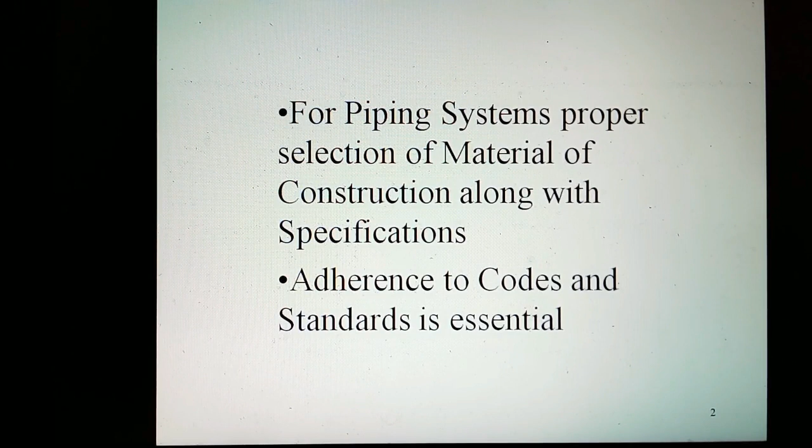For piping systems, proper selection of material of construction along with specifications and adherence to codes and standards is essential. Standardization reduces cost, confusion, and inconvenience.

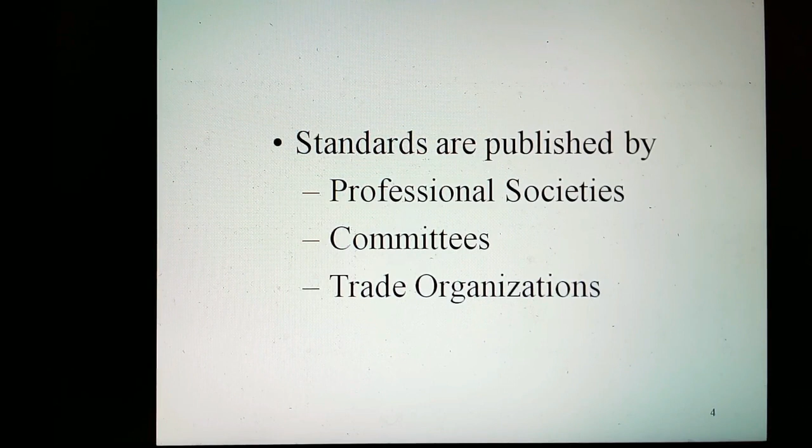Standards are published by professional societies, committees, and trade organizations. Code is also accepted by government. The main objective is to have standardization and safety.

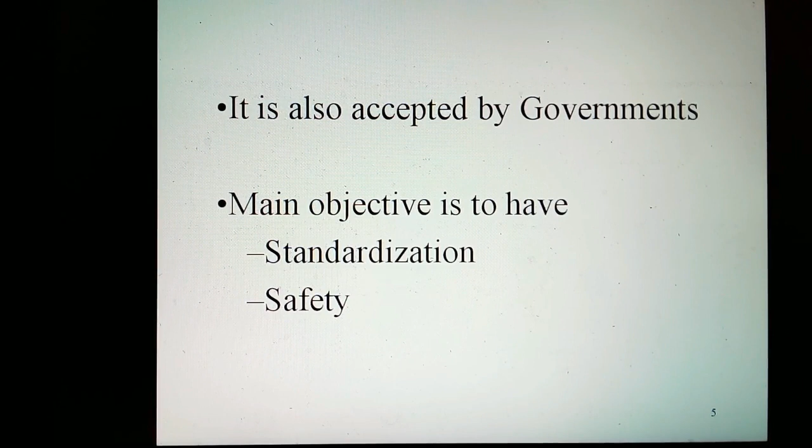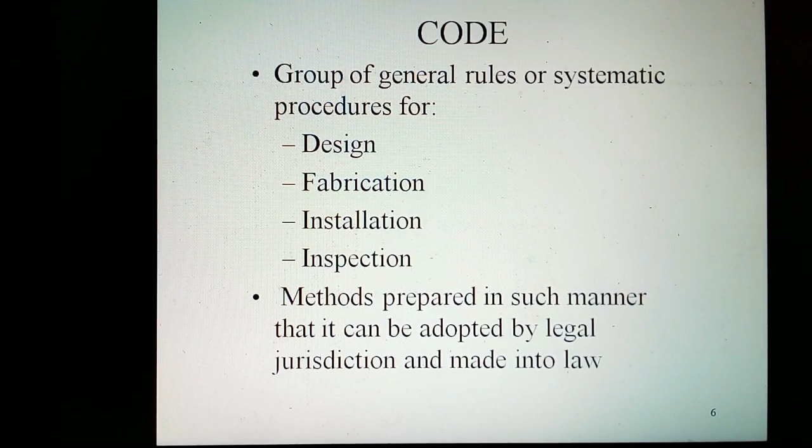A code is a group of general rules or systematic procedures for design, fabrication, installation, and inspection methods, prepared in such a manner that it can be adopted by legal jurisdiction and made into a law.

Standards are documents prepared by a professional group or committee which are believed to be good and proper engineering practices and which contain mandatory requirements.

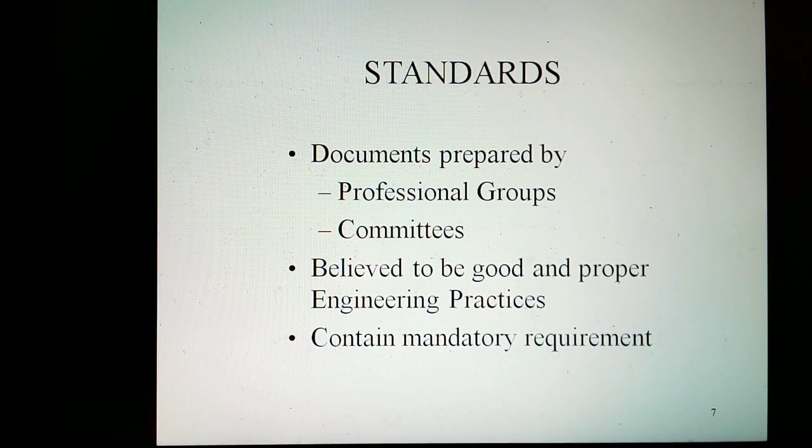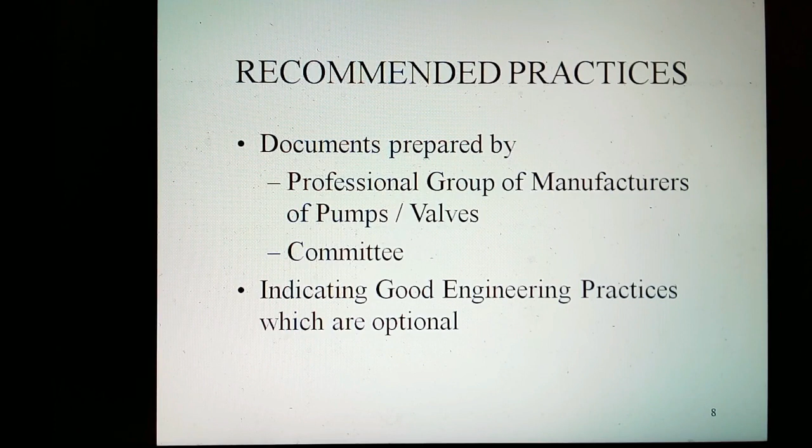Recommended practices are documents prepared by a professional group or committee indicating good engineering practices, but which are optional. Companies also develop guides in order to have consistency in documentation. These cover various engineering methods which are considered good practices, without specific recommendations or requirements.

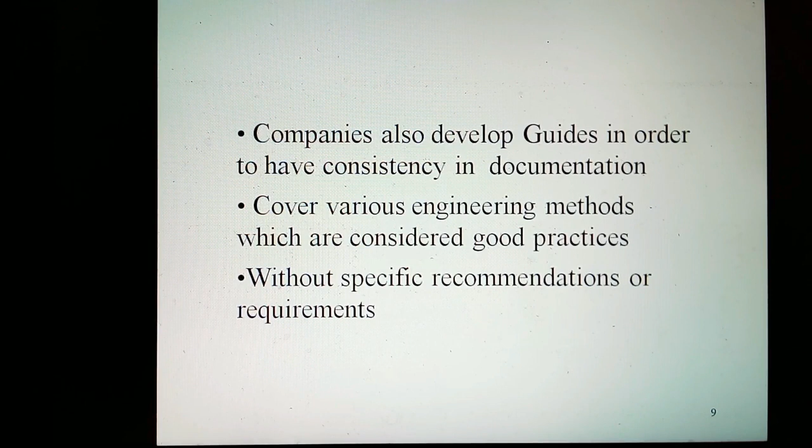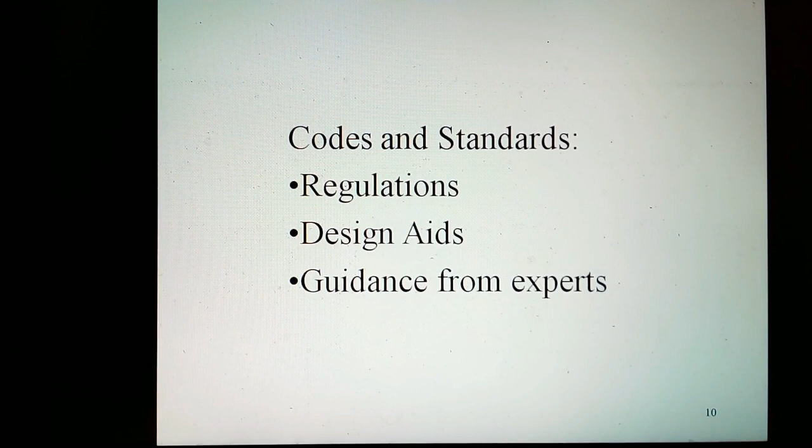Codes and standards, besides being regulations, might also be considered as design aids, since they provide guidance from experts.

Each country has its own codes and standards. On a global basis, American national standards are the most widely used, and compliance with those requirements is accepted worldwide. In India, other than American standards, British and Indian standards are also used for design and selection of piping systems.

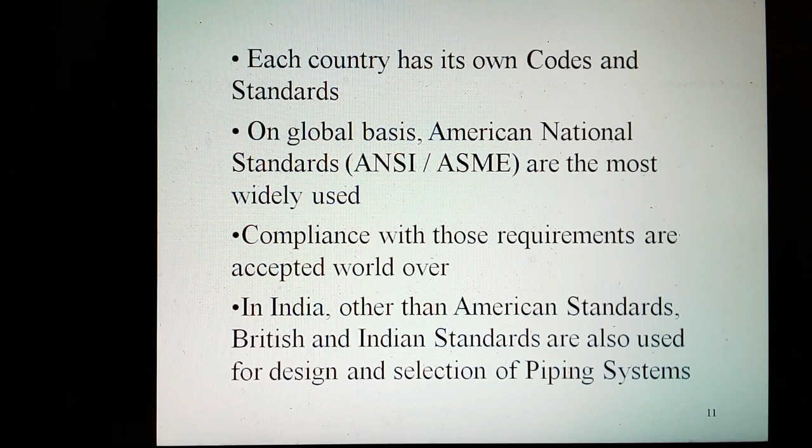American standards: not all American standards are issued directly by the American National Standards Institute. Material standards are covered under ASTM, American Society for Testing and Materials, and dimension standards under ANSI, American National Standards Institute. Most of these standards are adopted by ASME, American Society for Mechanical Engineers.

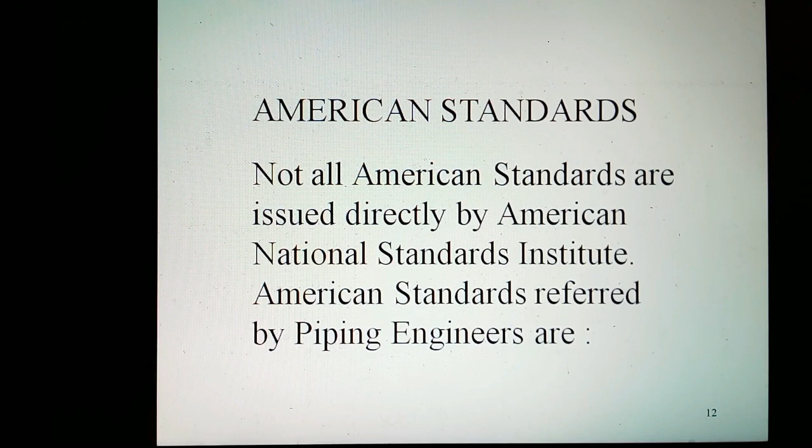The American standards referred by piping engineers include AISI, American Iron and Steel Institute, which specify a material by its chemical and physical properties. When a specific model or manufacturer of the element is not to be specified, the material can be identified by ANSI standards.

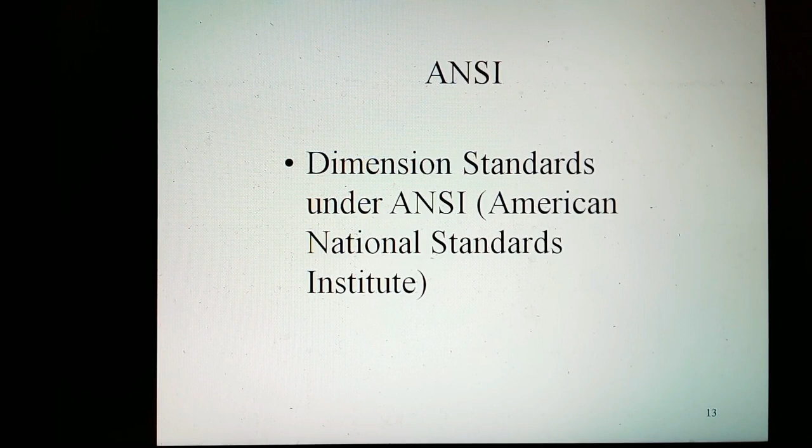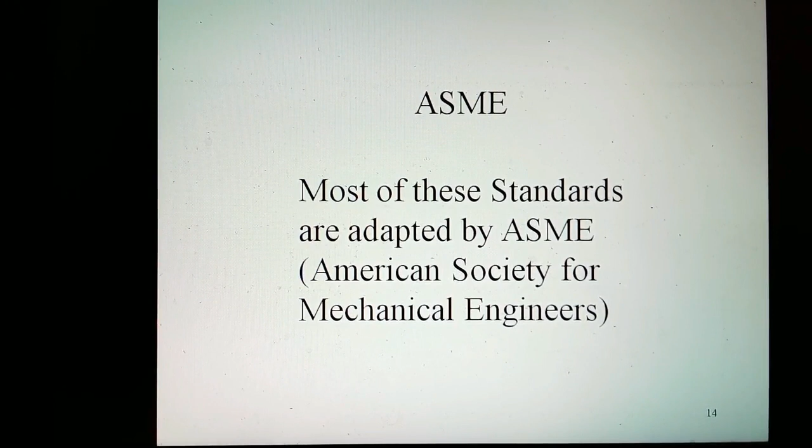ASME: most of these standards are adopted by ASME, American Society for Mechanical Engineers. ASTM: these are material standards covered under ASTM, American Society for Testing and Materials.

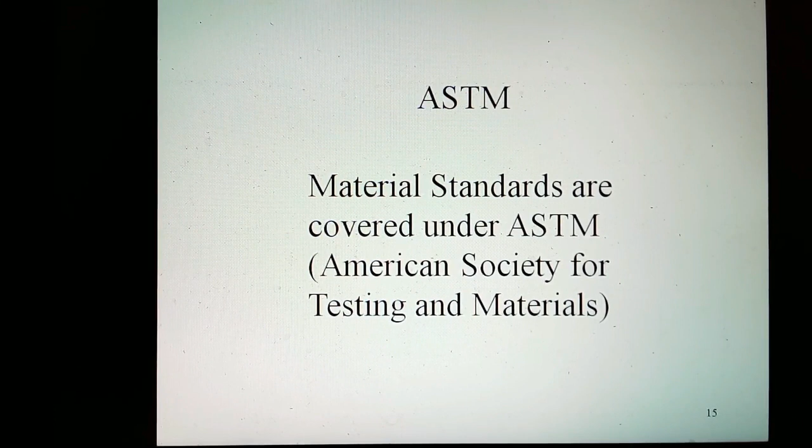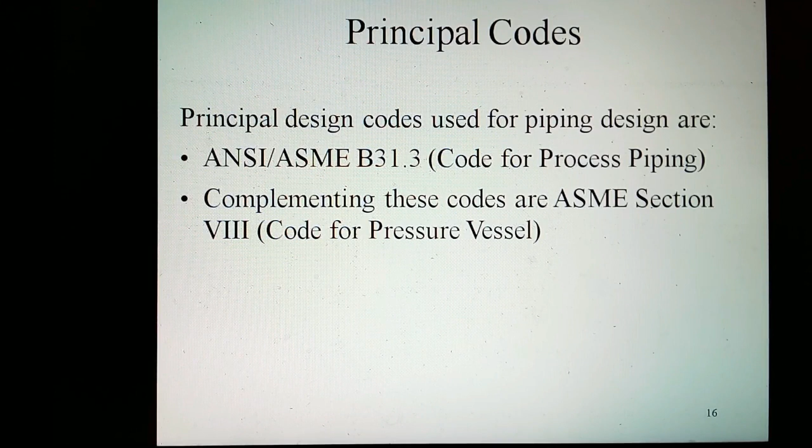Principal design codes used for piping design are ANSI or ASME B31.3, the code for process piping. Complementing these codes is ASME Section VIII, the code for pressure vessels.

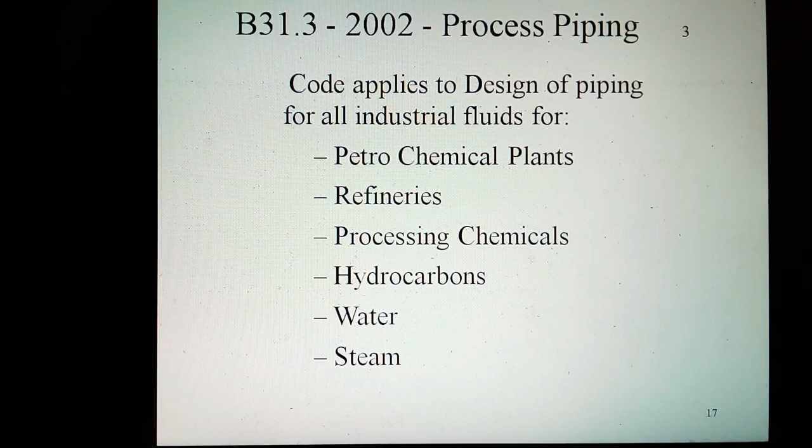B31.3, 2002, is the code for process piping design of chemical and petroleum plants and refineries, processing chemicals and hydrocarbons, water and steam.

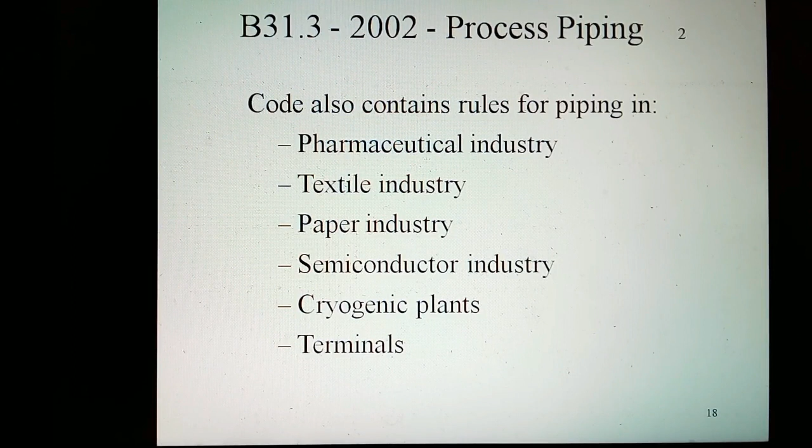This code contains rules for piping in chemical, pharmaceutical, textile, paper, semiconductor, and cryogenic plants, and related processing plants and terminals.

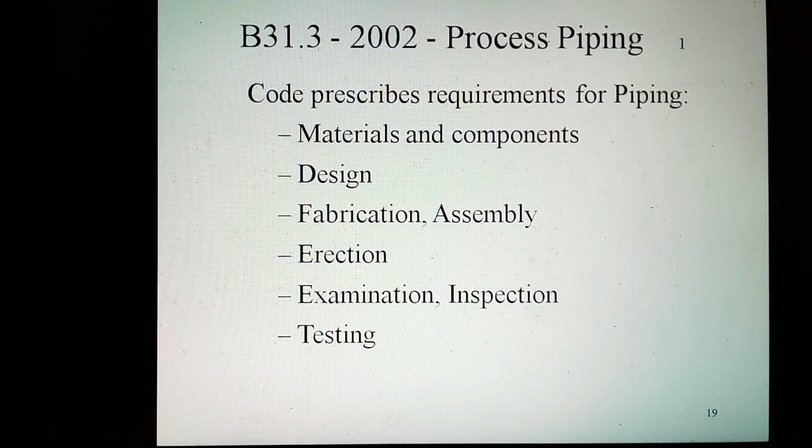This code prescribes requirements for materials and components, design, fabrication, assembly, erection, examination, inspection, and testing of piping.

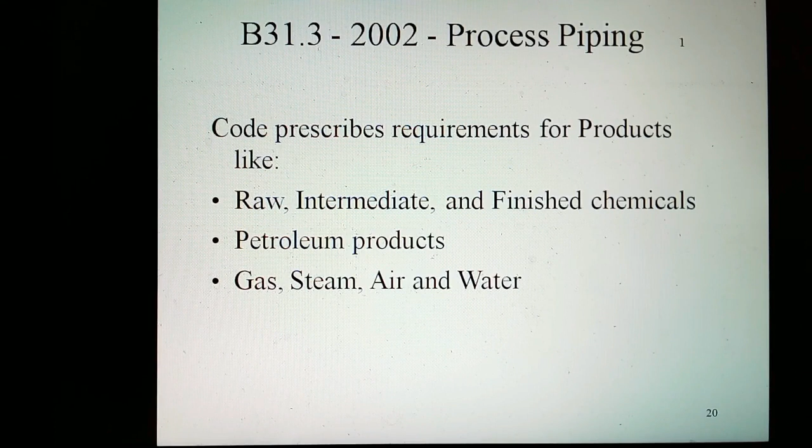This code applies to piping for all fluids including raw, intermediate, and finished chemicals, petroleum products, gas, steam, air, and water. It also applies to piping for fluidized solids, refrigerants, and cryogenic fluids. Also included is piping which interconnects pieces or stages within packaged equipment assembly.

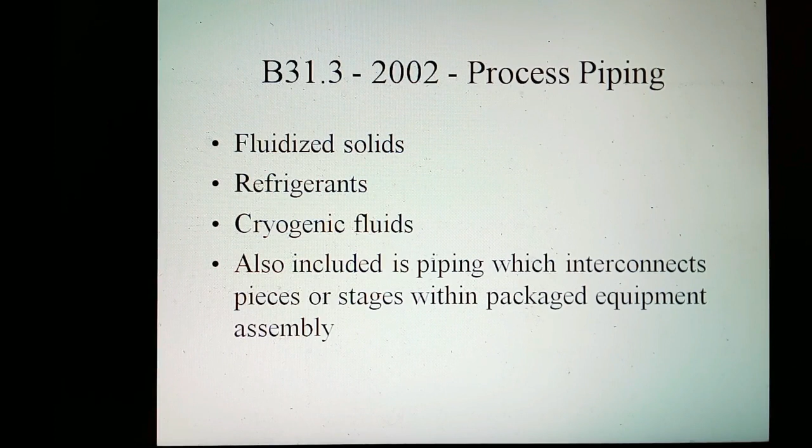Other American National Standards Institute standards used in design of piping systems: ANSI B31.1 of 2001 for power piping, ANSI B31.2 for fuel gas, ANSI B31.4 for pipeline transportation systems for liquid hydrocarbon and other liquids, and ANSI B31.5 for refrigeration piping.

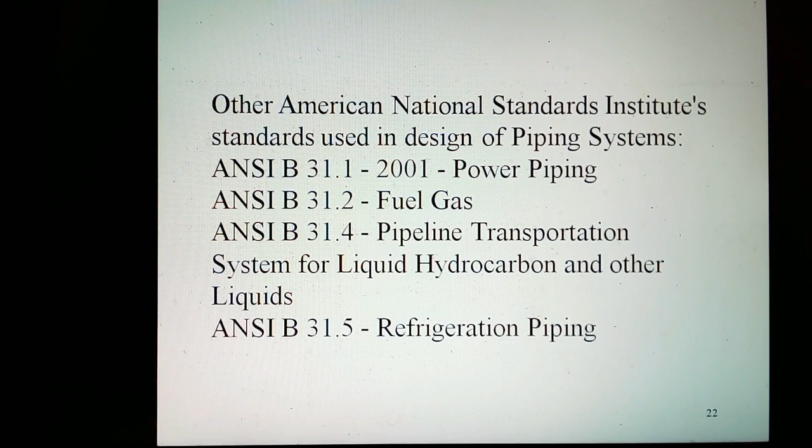Other American National Standards Institute standards used in design of piping systems: ANSI B31.8 for gas transmission and distribution piping systems, ANSI B31.9 for building services piping, ANSI B31.11 for slurry transportation piping systems, and ANSI B31.G, a manual for determining remaining strength of corroded piping, which is a supplement to ANSI B31.

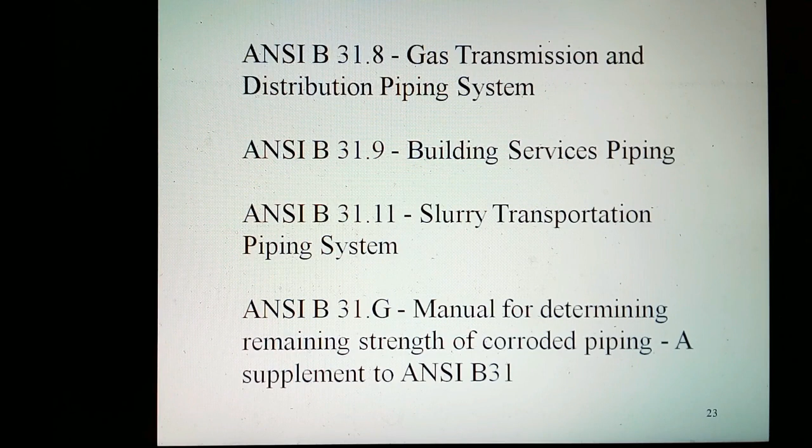The American Petroleum Institute API standards referred to by piping engineers are API 5L for specification for line pipe, API 6D for pipeline valves and end closures, connectors and swivels, API 6F for recommended practice for fire test for valves, API 593 for ductile iron plug valves for flanged ends, API 598 for valve inspection and test, API 600 for steel gate valves, and API 601 for metallic gaskets for refinery piping.

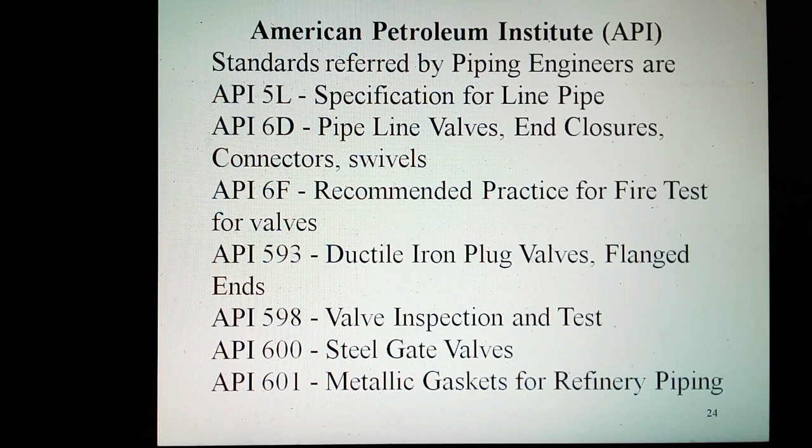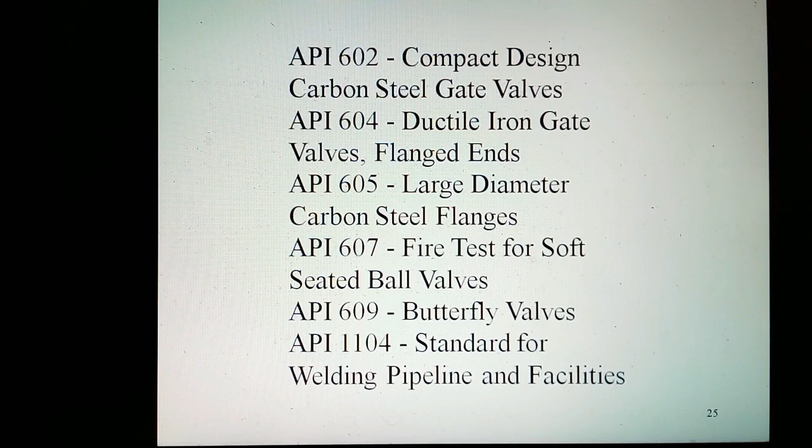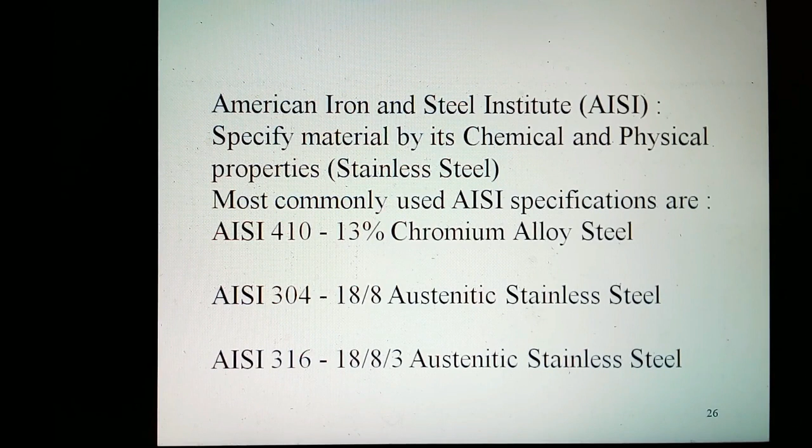American Iron and Steel Institute, AISI, specifies material by its chemical and physical properties for stainless steels. The most commonly used AISI specifications are AISI 410 for 13% chromium alloy steel, AISI 304 for 18/8 austenitic stainless steel, and AISI 316 for 18/8/3 austenitic stainless steel.

Other major ANSI or ASME standards referring to piping elements are ANSI B1.1 for unified inch screw threads, ASME B1.20.1 for pipe threads for general purposes, ASME B16.1 for cast iron pipe flanges and flanged fittings, ASME B16.3 for malleable iron threaded fittings, ASME B16.4 for cast iron threaded fittings, and ASME B16.5 for steel pipe flanges and flanged fittings.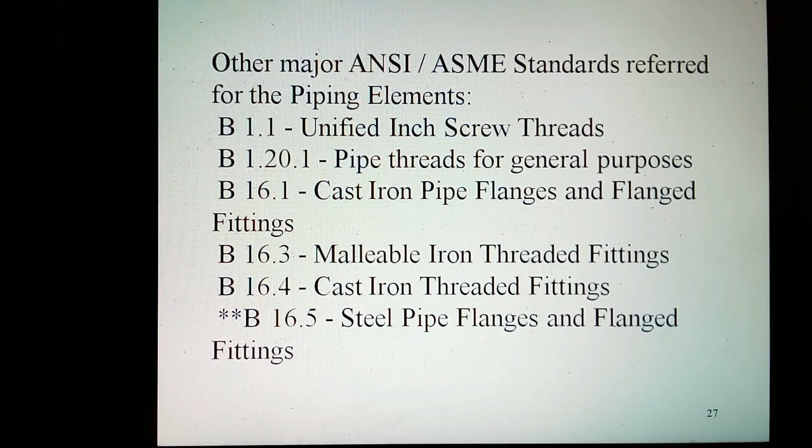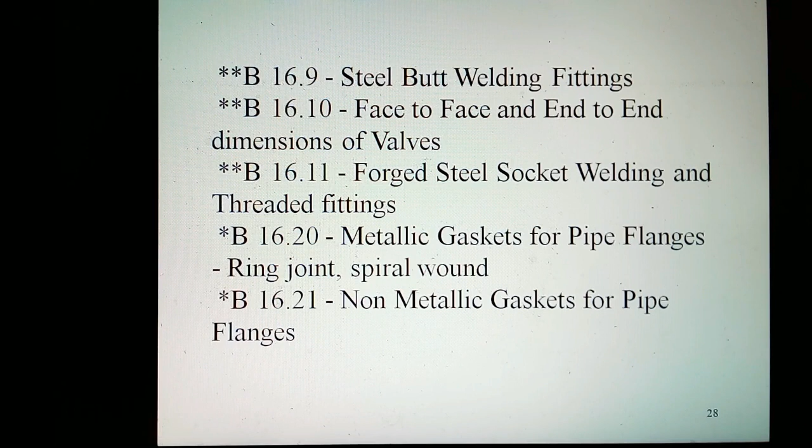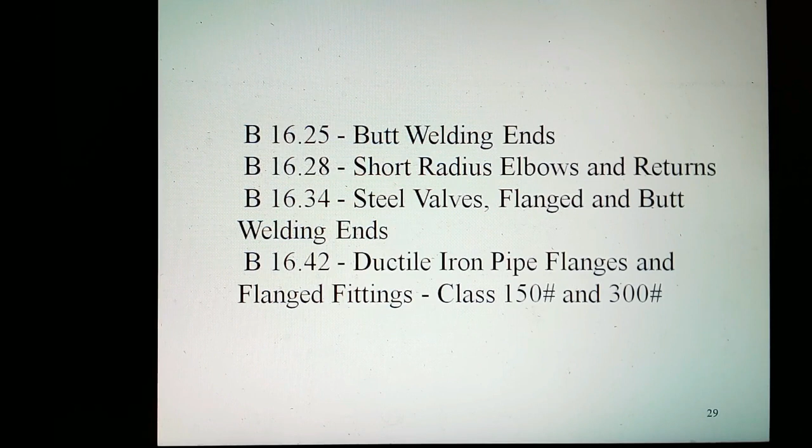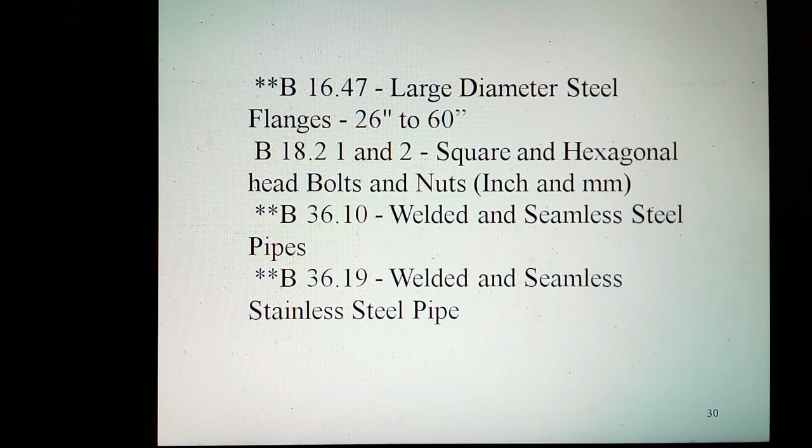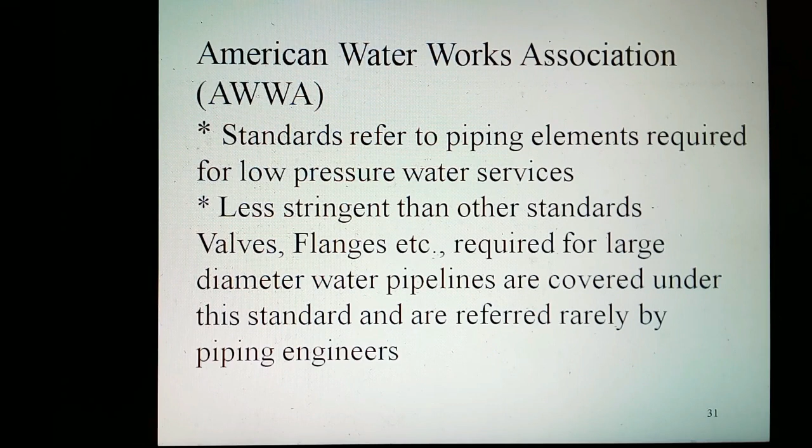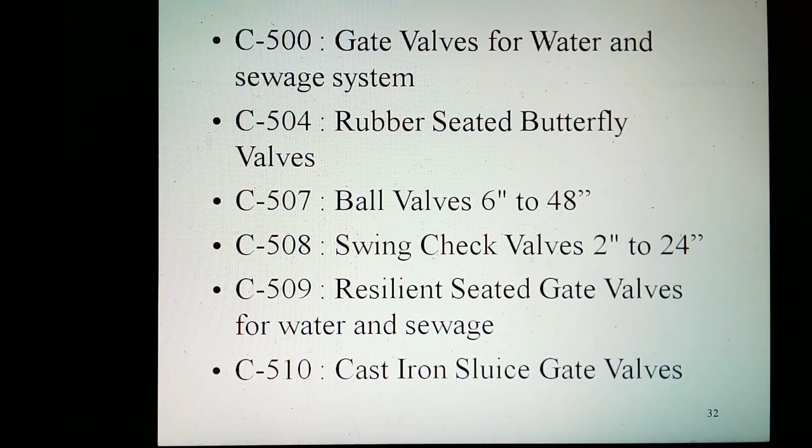Some standards referred are C500 for gate valves for water and sewage systems, C504 for rubber-seated butterfly valves, C507 for ball valves 6 inches to 48 inches, C508 for swing check valves 2 inches to 24 inches, C509 for resilient seated gate valves for water and sewage, and C510 for cast iron sluice gate valves.

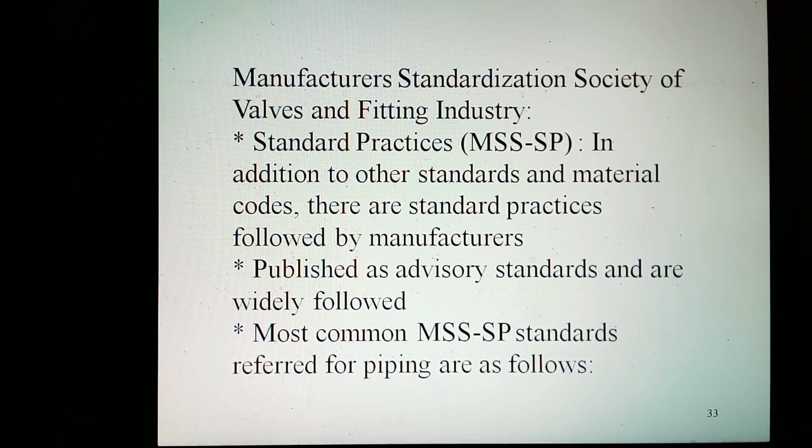The Manufacturers Standardization Society of the Valves and Fittings Industry Standard Practices, MSS-SP. In addition to the above standards and material codes, there are standard practices followed by manufacturers. These are published as advisory standards and are widely followed. The most common MSS-SP standards referred for piping are as follows.

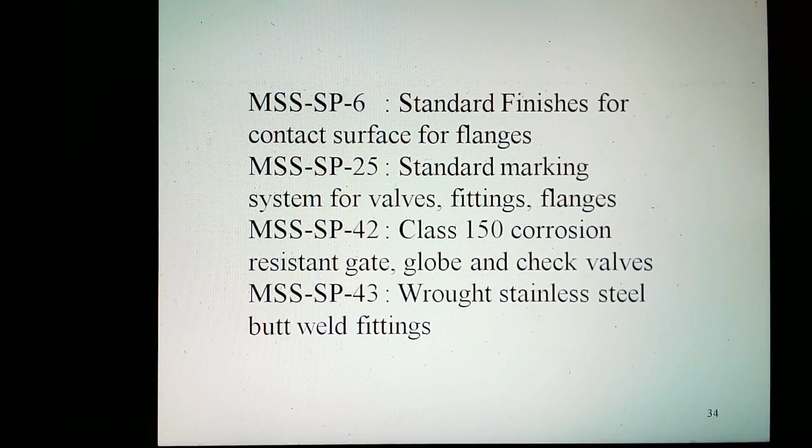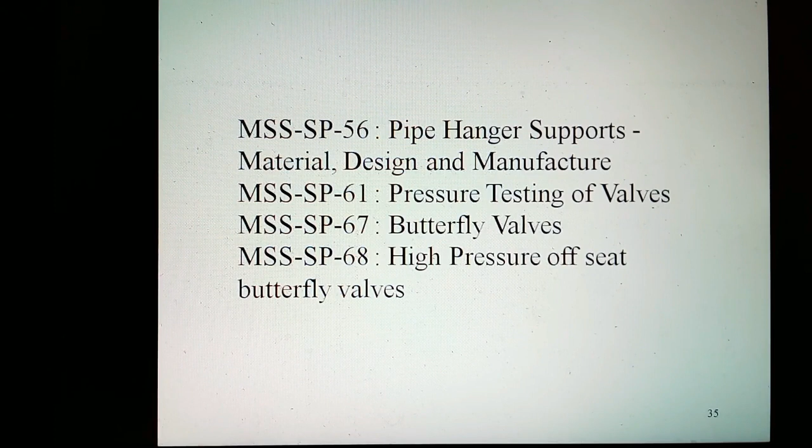MSS-SP 56, Pipe Hanger Supports explaining Material, Design and Manufacture. MSS-SP 61, Pressure Testing of Valves. MSS-SP 67, Butterfly Valves. MSS-SP 68, High Pressure Off-Seat Butterfly Valves.

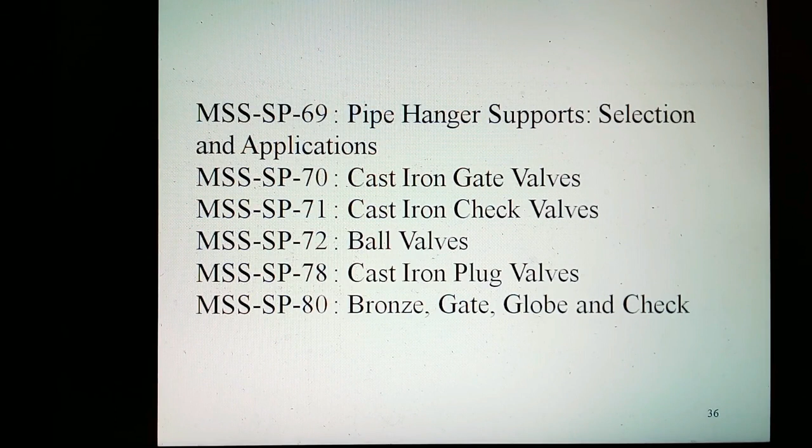MSS-SP 69, Pipe Hanger Supports, Selection and Applications. MSS-SP 70, Cast Iron Gate Valves. MSS-SP 71, Cast Iron Check Valves. MSS-SP 72, Ball Valves. MSS-SP 78, Cast Iron Plug Valves. MSS-SP 80, Bronze Gate, Globe and Check Valves.

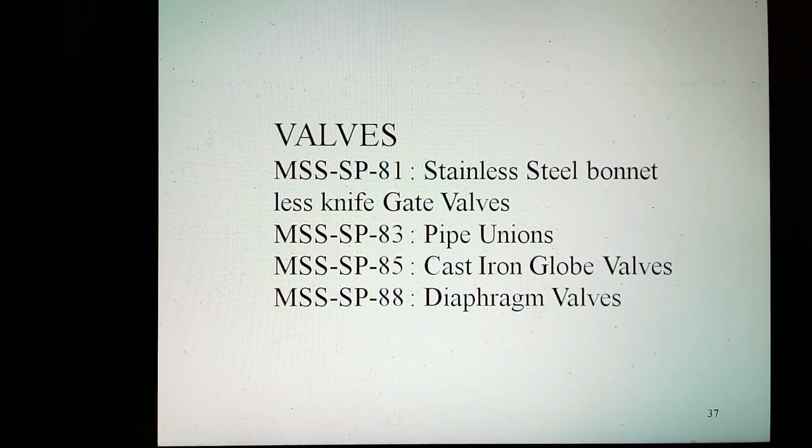MSS-SP 81, Stainless Steel Bonnetless Knife Gate Valves. MSS-SP 83, Pipe Unions. MSS-SP 85, Cast Iron Globe Valves. MSS-SP 88, Diaphragm Valves. MSS-SP 89, Pipe Hangers and Supports explaining Fabrication and Installation Practices.

MSS-SP 90, Pipe Hangers and Supports with Guidelines on Terminology. MSS-SP 92, MSS Valve User Guide. MSS-SP 108, Resilient Seated Eccentric Cast Iron Plug Valves.

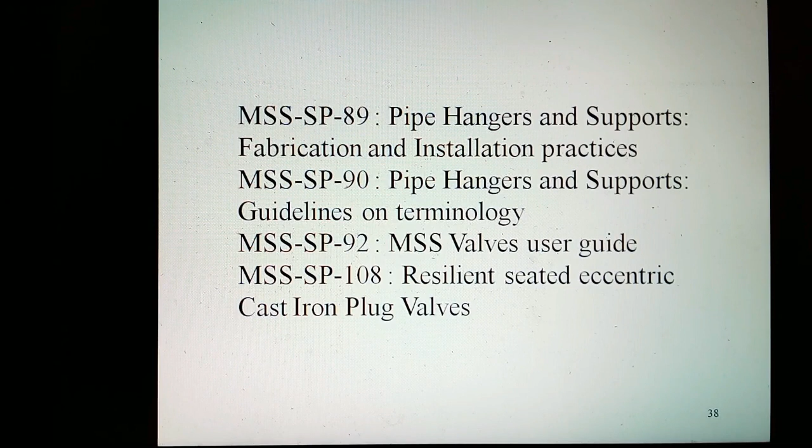British Standards. In many instances, it is possible to find British standards which may be substitutes for American standards. BS 2080, the British standard for face-to-face or end-to-end dimensions of valves, is identical to ANSI/ASME B16.10. Similarly, BS 3799 and ANSI/ASME B16.11 also compare.

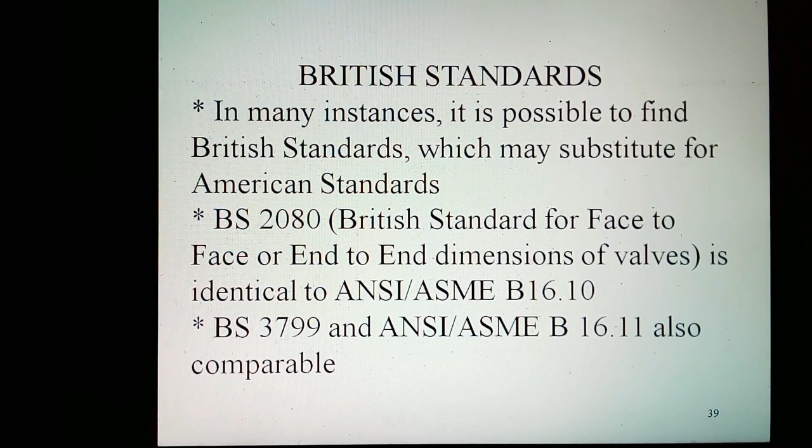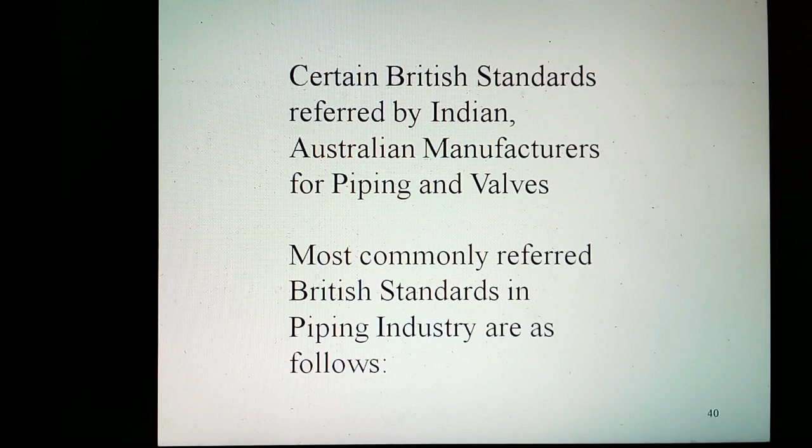There are certain British standards referred by Indian manufacturers for piping and valves. The most commonly referred British standards in the piping industry are BS-10 for flanges and BS-806 for pipes and fittings for boilers.

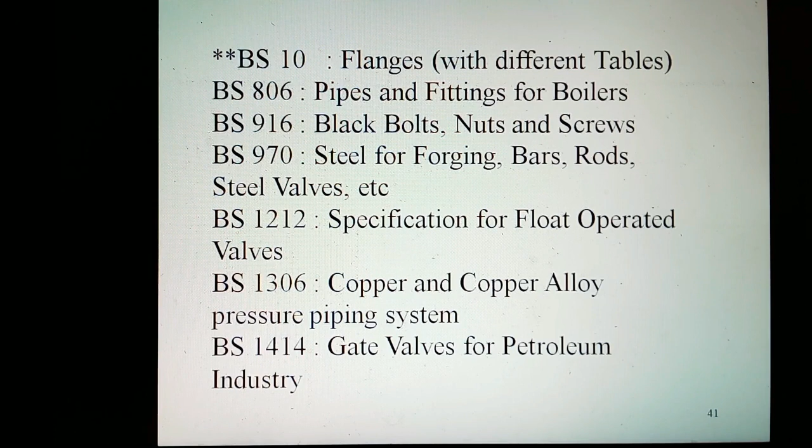BS-916 for black bolts, nuts and screws. BS-970 for steel for forging, bar, rods, valves, steel, etc. BS-1212 specification for float-operated valves. BS-1306 for copper and copper alloy pressure piping systems.

BS-1414 for gate valves for the petroleum industry. BS-1560 for steel pipe flanges. BS-1600 for dimensions of steel pipes. BS-1640 for welding fittings.

BS-1740 for wrought steel screw pipe fittings. BS-1868 for steel check valves for the petroleum industry. BS-1873 for steel globe and check valves for the petroleum industry. BS-1965 for welding pipe fittings.

BS-2080 for face-to-face and end-to-end dimensions of valves. BS-2598 for glass pipeline and fittings. BS-3059 for boiler and superheater tubes. BS-3063 for dimensions of gaskets for pipe flanges.

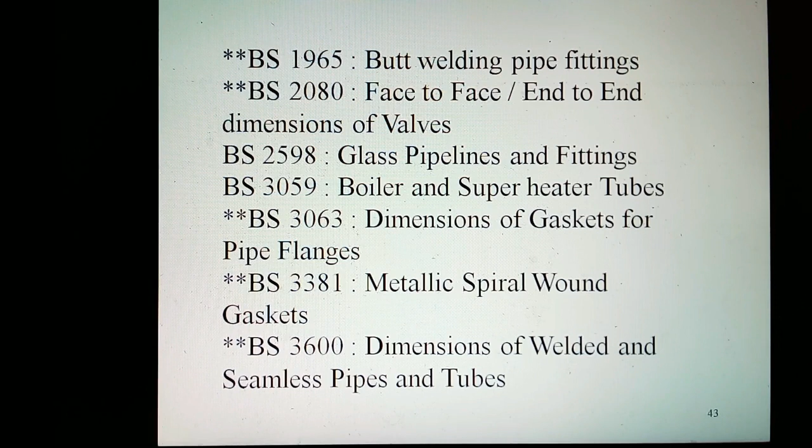BS-3381 for metallic spiral wound gaskets. BS-3600 for dimensions of welded and seamless pipes and tubes. BS-3601 for carbon steel pipes and tubes for pressure purposes at room temperature. BS-3602 for carbon steel pipes and tubes for pressure purposes at high temperature.

BS-3603 for carbon steel and alloy steel pipes and tubes for pressure purposes at low temperature, and BS-3604 for alloy steel pipes and tubes for high temperature.

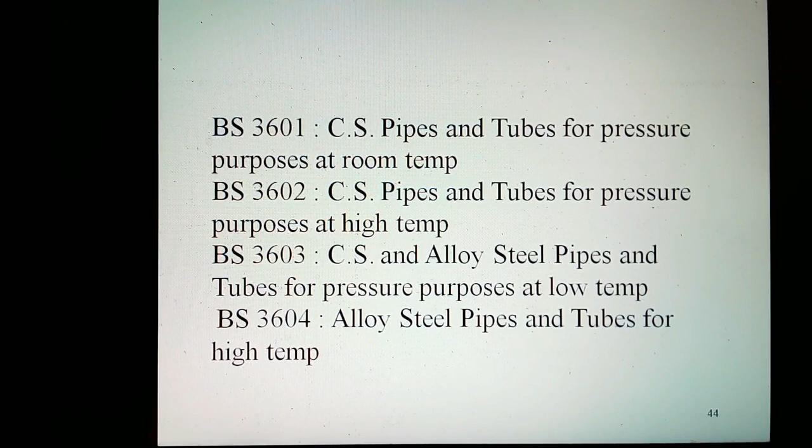BS-3605 for stainless steel pipes and tubes for pressure purposes. BS-3799 for socket weld and screw fittings. BS-3974 for pipe hangers, slides and roller type supports.

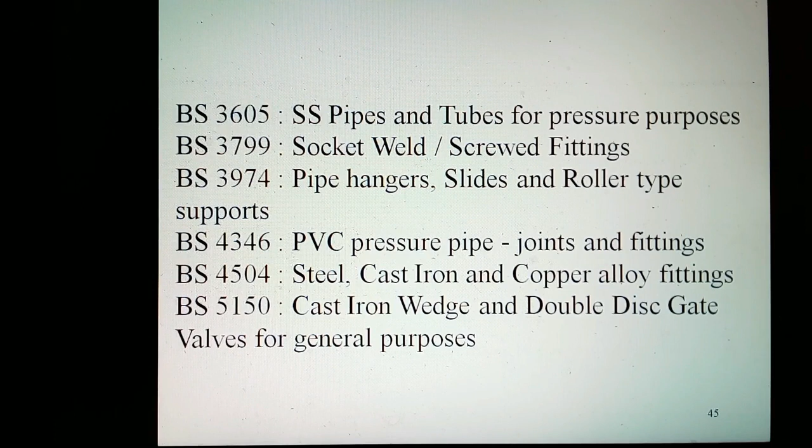BS-4346 for PVC pressure pipe, joints and fittings. BS-4504 for steel, cast iron and copper alloy fittings. BS-5150 for cast iron wedge and double disc gate valves for general purposes. BS-5151 for cast iron gate parallel slide valves for general purposes.

BS-5152 for cast iron globe and check valves for general purposes. BS-5153 for cast iron check valves for general purposes. BS-5154 for copper alloy globe, gate and check valves. BS-5155 for cast iron and cast steel butterfly valves for general purposes.

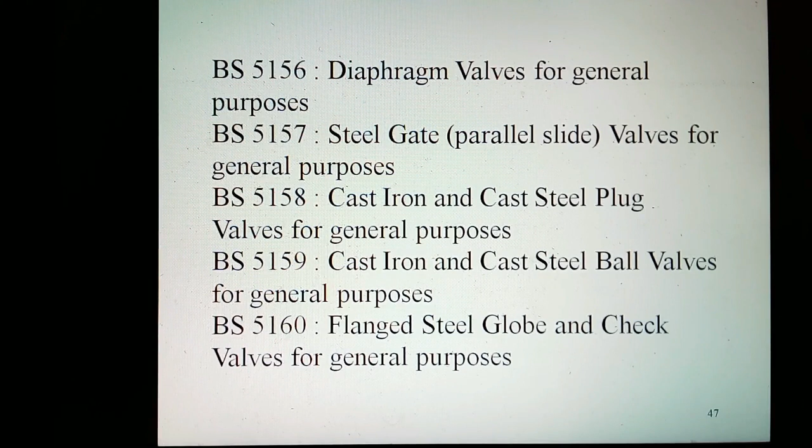BS-5156 diaphragm valves for general purposes. BS-5157 steel gate parallel slide valves for general purposes. BS-5158 cast iron and cast steel plug valves for general purposes. BS-5159 cast iron and cast steel ball valves for general purposes. BS-5160 flanged steel globe and check valves for general purposes.

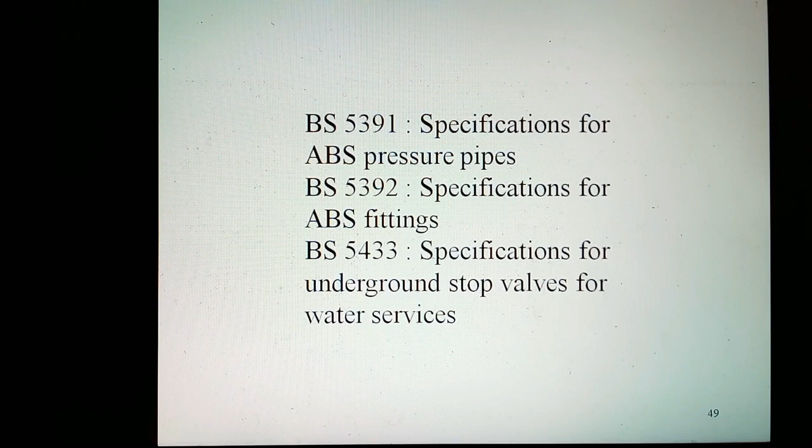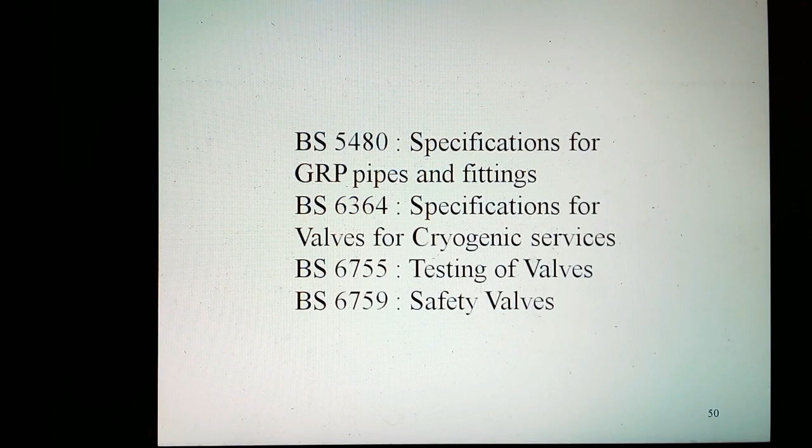BS-5392 specifications for ABS fittings. BS-5433 specifications for underground stop valves for water services. BS 5480 specifications for GRP pipes and fittings. BS 6364 specifications for valves for cryogenic services. BS 6755 testing of valves. BS 6759 safety valves.

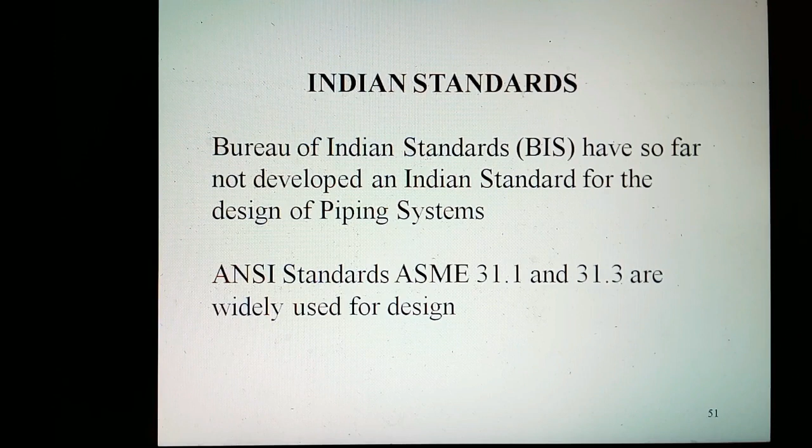Indian Standards, Bureau of Indian Standards. BIS has so far not developed an Indian standard for the design of piping systems. Hence, ANSI standards ASME 31.1 and 31.3 are widely used for the design. These standards also accept materials covered in other standards. Unlike American standards, Indian standards cover dimensions and material specifications under the same standard number. There are no groupings based on branch of engineering.

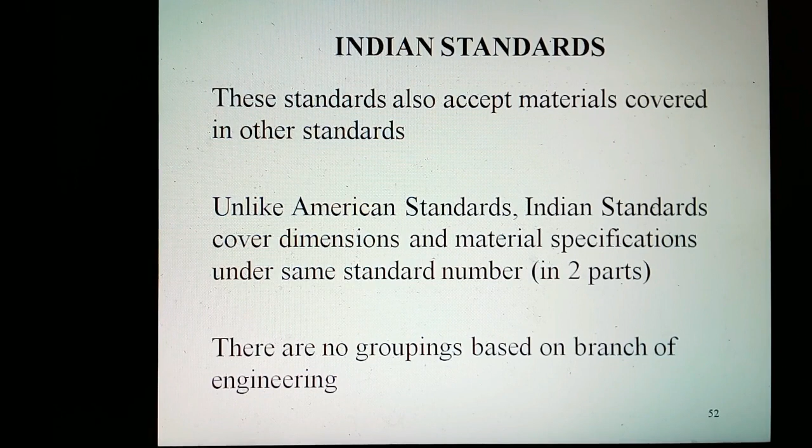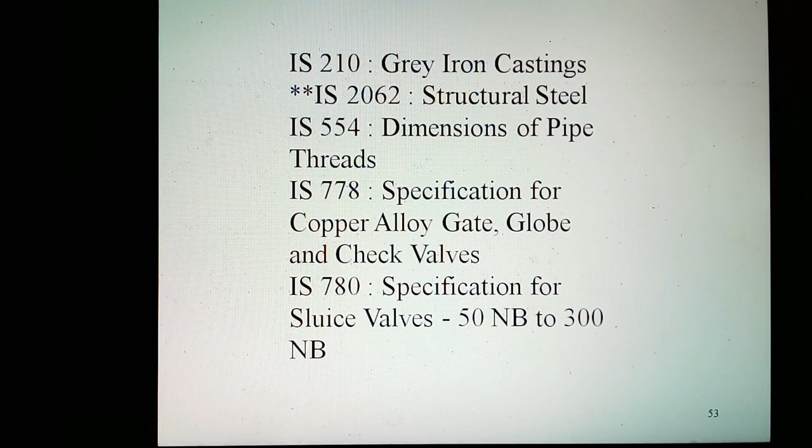Some of the most commonly referred Indian standards by piping engineers are IS 210, grey iron castings; IS 226, structural steel, superseded by IS 2062; IS 554, dimensions of pipe threads; IS 778, specification for copper alloy gate, globe and check valves; IS 780, specification for sluice valves for 50 NB to 300 NB.

IS 1239 Part I and II, specification for mild steel tubes and fittings; IS 1363, hexagonal bolts, screws and nuts of grade C; IS 1364, hexagonal bolts, screws and nuts grade A and B; IS 1367, technical supply conditions for threaded steel fasteners; IS 1536, centrifugally cast iron pipes.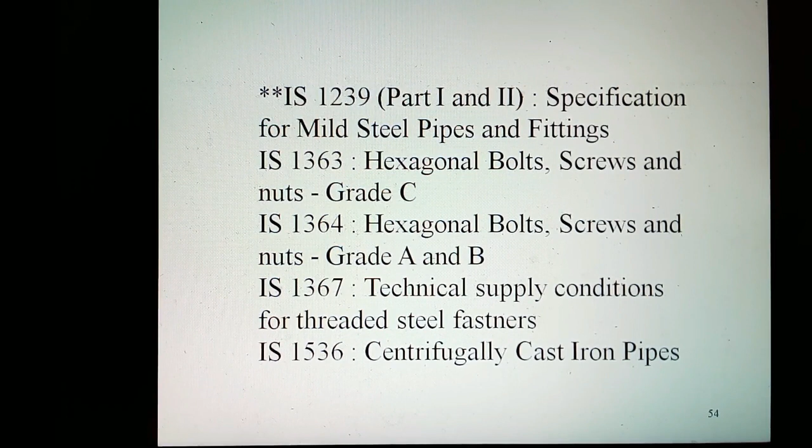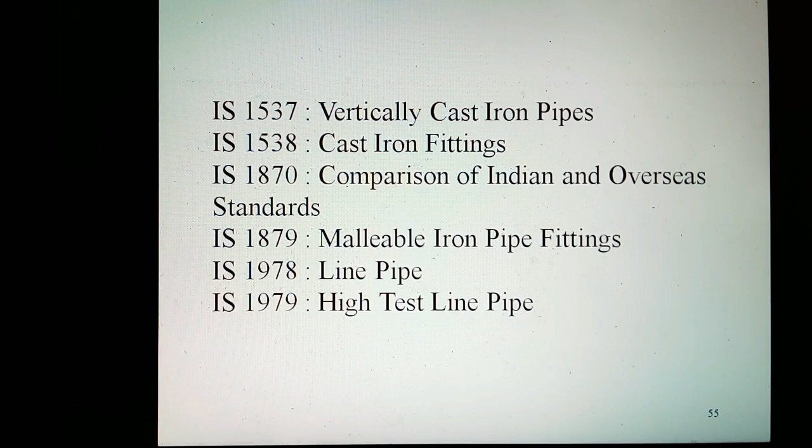IS 1537, vertically cast iron pipes; IS 1538, cast iron fittings; IS 1870, comparison of Indian and overseas standards; IS 1879, malleable iron pipe fittings; IS 1978, line pipe; IS 1979, high test line pipe.

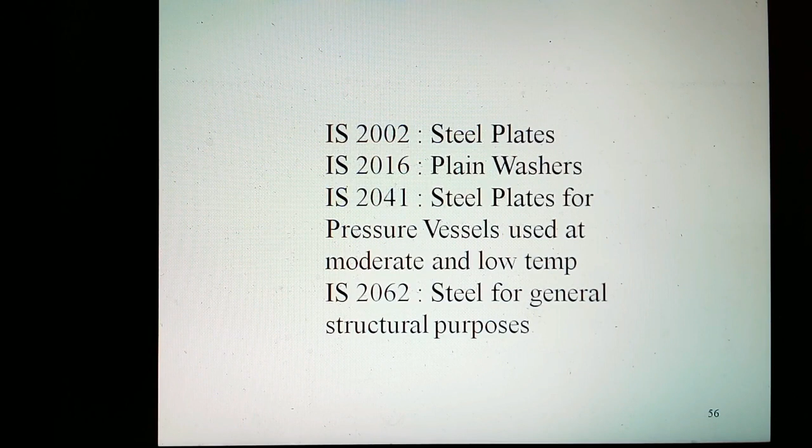IS 2002, steel plates; IS 2016, plain washers; IS 2041, steel plates for pressure vessels used at moderate and low temperature; IS 2062, steel for general structural purposes.

IS 2379, color code for identification of pipelines; IS 2712, compressed asbestos fiber jointing; IS 2825, code for unfired pressure vessels; IS 2906, specification for sluice valves for 350 NB to 1200 NB; IS 3076, specification for LDPE pipes.

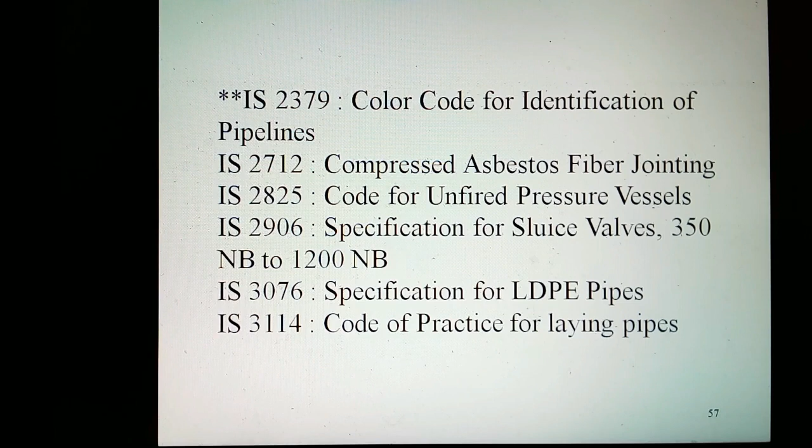IS 3114, code of practice for laying pipes; IS 3516, cast iron flanges and flanged fittings for petroleum industry; IS 3589, seamless or ERW pipes of 150 NB to 2000 NB.

IS 4038, specifications for foot valves; IS 4179, sizes for pressure vessels and leading dimensions; IS 4853, radiographic examination of butt weld joints in pipes.

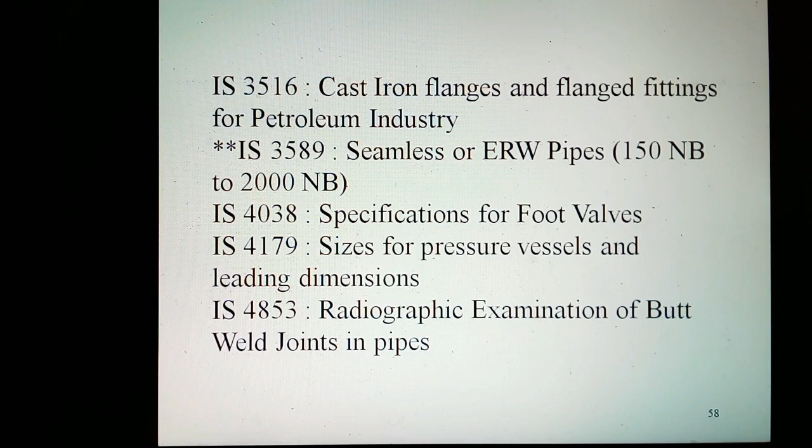IS 4864 to 4870, shell flanges for vessels and equipments; IS 4984, specification for HDPE pipes; IS 4985, specification for PVC pipes; IS 5312, specification for check valves; IS 5572, classification of hazardous area for electrical installation.

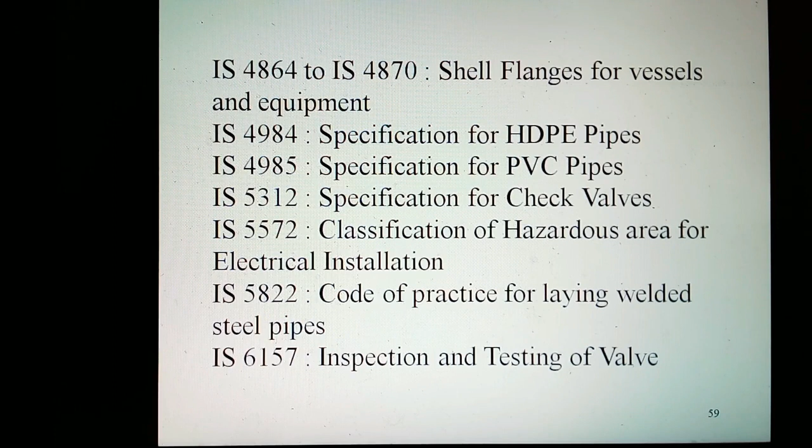IS 5822, code of practice for laying welded steel pipes; IS 6157, inspection and testing of valves; IS 6286, seamless and welded pipes for sub-zero temperatures.

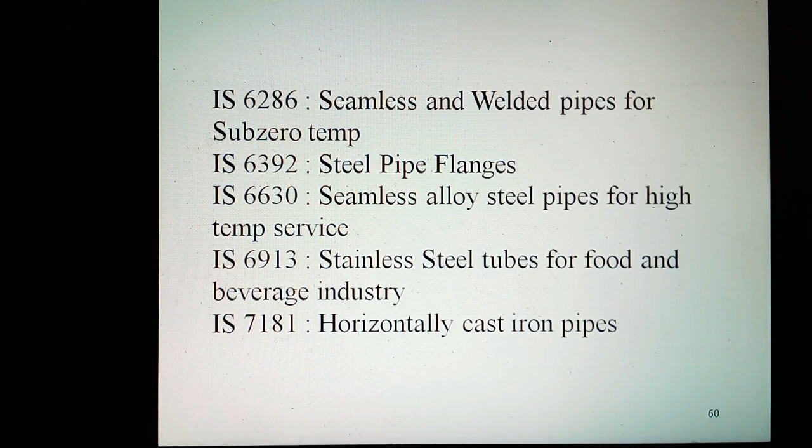IS 6392, steel pipe flanges; IS 6630, seamless alloy steel pipes for high temperature service; IS 6913, stainless steel tubes for food and beverage industry; IS 7181, horizontally cast iron pipes.

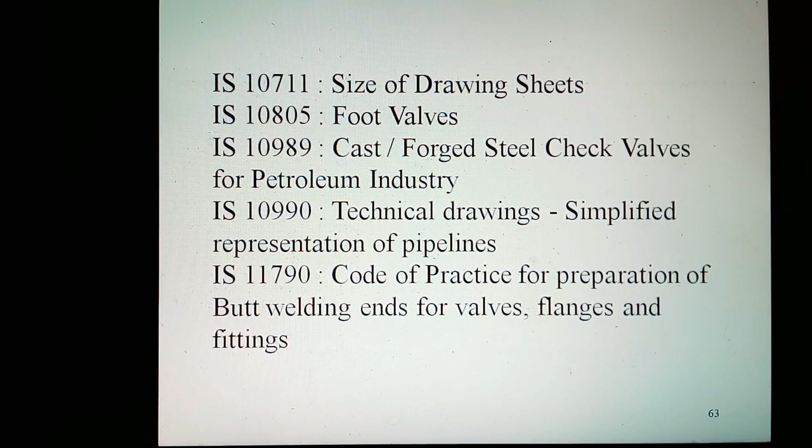IS 11790, code of practice for preparation of butt welding ends for valves, flanges and fittings; IS 11791, diaphragm valves for general purposes; IS 11792, steel ball valves for petroleum industry.

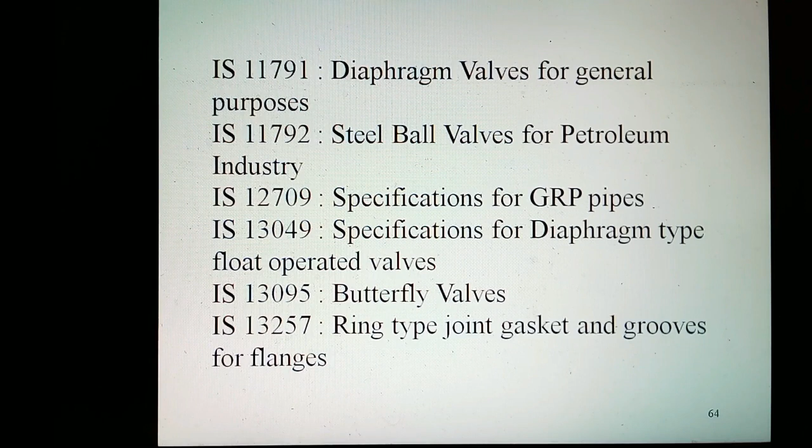IS 12709, specifications for GRP pipes; IS 13049, specifications for diaphragm-type float-operated valves; IS 13095, butterfly valves; IS 13257, ring-type joint gasket and grooves for flanges.

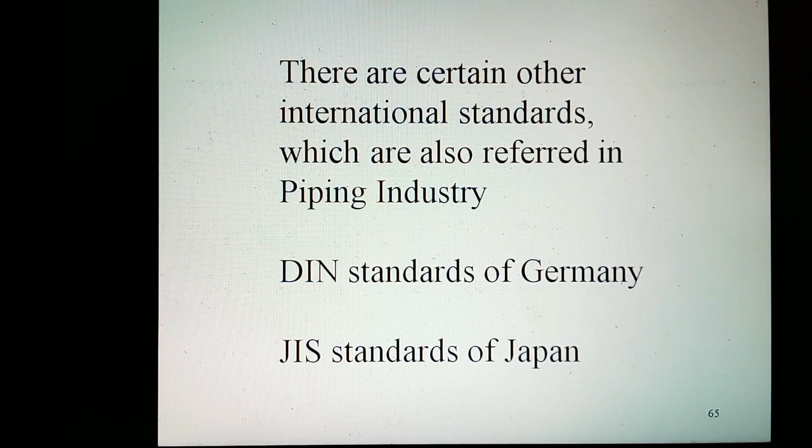There are certain other international standards which are also referred in the piping industry. These are the DIN standards of Germany and JIS standards of Japan. These standards are more popular and equivalent. Periodic review of the standards by the committee is done, and these are revised to incorporate modified features based on research and feedback from industry. It is hence necessary that the latest editions of the codes and standards are referred for the design.